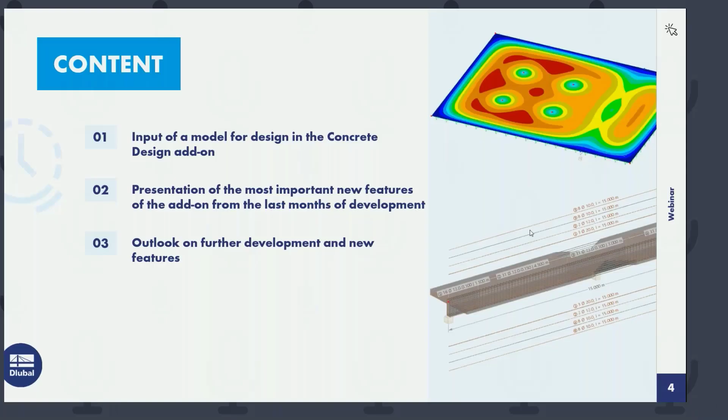Okay, thanks Andreas for the introduction. I will start with a short overview about the content of today's presentation. So, as I already mentioned, I will show you today new features in our concrete design add-on. Therefore, I will create a small structure in RFEM 6. And during the modeling process, I will tell you all the new features which we have now in our concrete design add-on.

Just a short overview about these new features. Mainly it's the automatic function for surface reinforcement. Then we have also a new function regarding determination of required reinforcement for members, which includes now also the serviceability limit state design. Then I will show you how to design with member representatives. We have also a new multi-edit option in the edit member dialog for members and member sets.

If we have entered a reinforcement and we have a certain reinforcement layout inside our member, then we have a new function for printing graphics of this reinforcement template or proposal into the printout report. I will show this also to you. And I will show you how to activate the design check for this shear joint in the add-on.

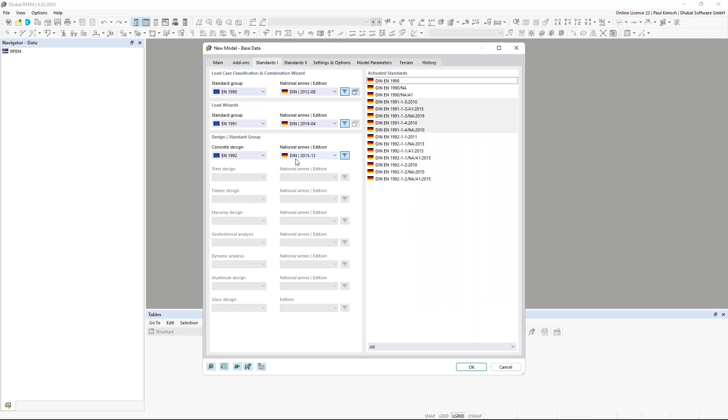That has the benefit that there are some settings stored already in the template, and also add-ons can be activated, or I could predefine here some national annexes and so on. So this is already set in this template, and I would give the name here webinar, and maybe English, so that's the English one. And I start this file here.

As mentioned, due to the fact that I've used these templates, I have here a certain amount of materials, sections, thicknesses, and so on. I will use them today for this presentation.

So at first, I'm switching here to these guide objects, and there I will create a new line grid.

I will use and show you today also the labels and dimensions. Switching here, I enter the dimensions in X direction: 5 meters and 4 spans. So it looks like this. In Y direction, the first span is 5 meters, then 2.5 meters with 2 spans, and the last one is again 5 meters. So this is my line grid, which I would like to use today.

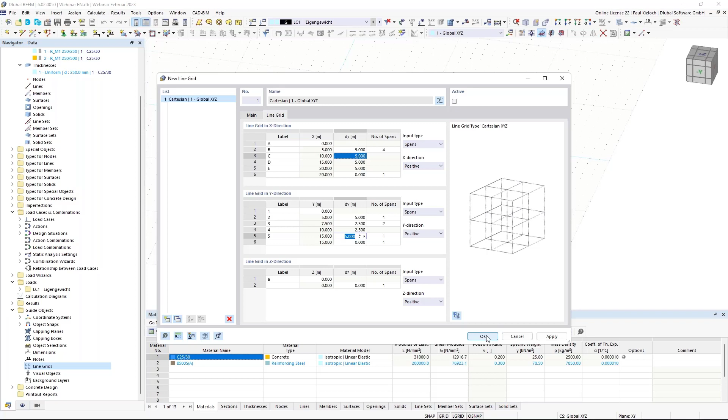It looks like this. On this line grid, I will create my slab, beams, columns and so on. I can switch off the grid in the background, so it's a little cleaner if you just see the line grids.

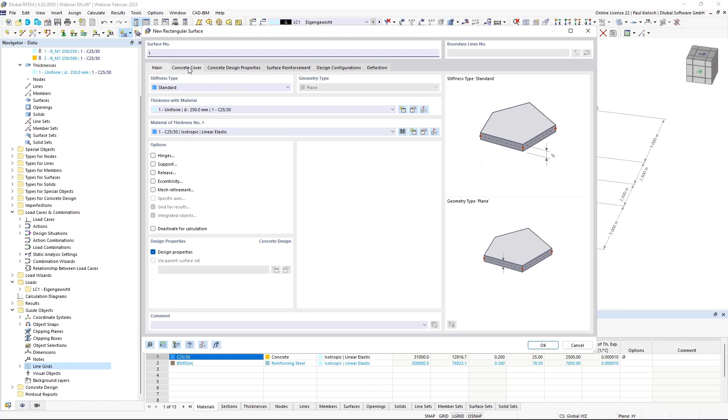The first topic is entering a surface for design. I'm creating here a concrete surface with a thickness of 250 millimeters and this concrete. Before entering this surface, I can directly set the design properties for this slab. The concrete cover and concrete durability class, I leave as default here in this example, XC1.

The reinforcement direction is also default. I will consider and assign a basic reinforcement for the whole slab with a diameter of 10 millimeters and a spacing of 15 centimeters in both directions.

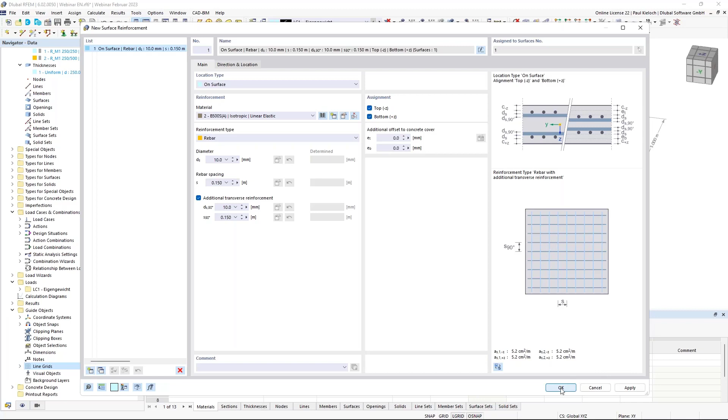You see here already some changes in this dialog, and I will come back to these changes and modifications of this dialog in this latest version of RFEM 6 later, after the first calculation. I can confirm this. The design configurations I leave by default for this first attempt, and I will also come back later to these design configurations.

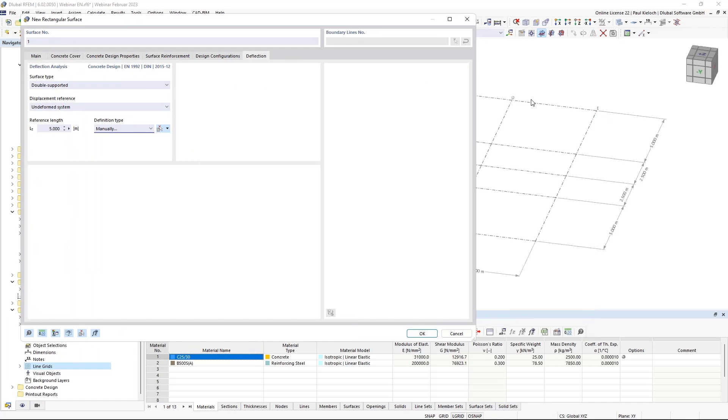The last thing I'm changing here is the reference length for the deflection analysis. I switch this to manual, and the reference length is now set to 5 meters, since I have 5 meters in X and Y direction. Confirm with OK, and then I create my slab.

By default, you see here the rendering of the assigned reinforcement mesh. What's new now in RFEM in the latest version is the description of the assigned reinforcement. We changed it a little bit. In previous versions, there was a small arrow downwards or upwards — downwards meant reinforcement on the bottom side, upwards meant reinforcement on the top side of the slab.

That was changed a little bit, and now it's just a small line next to the text, on the downside or the upper side. So it's a small change. What I would like to change is the number of decimal places for this example. Now I'm switching off this reinforcement just to have a cleaner look on the structure.

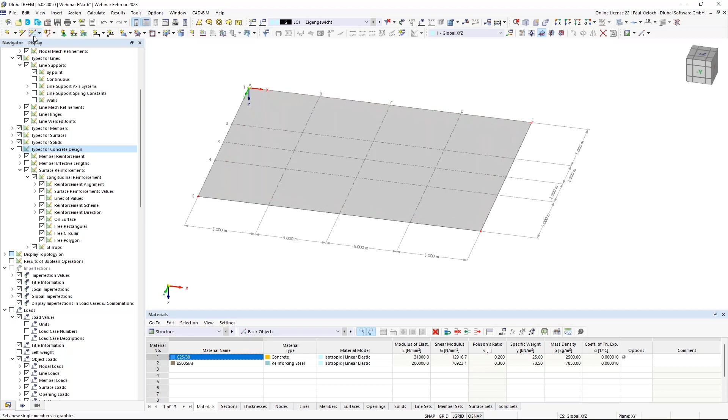The next topic is that I would like to enter a beam, or a rib member, in this axis D. I create a new member, switch the type to rib, and assign this eccentric cross-section on the positive Z side of the surface — that's the default setting. The used section should be this 250 by 500 millimeter section. I can confirm that's okay.

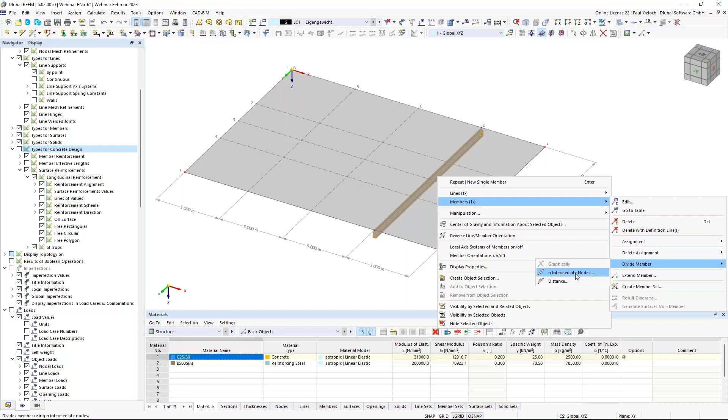Then I will assign this rib here in this axis. Here in axis 3, in the middle of the beam, I would like to support this beam with a column, so I'm dividing this member by one intermediate node. But what's new in RFEM 6 is that we can use this node type 'on member', which has the benefit that our member is not divided into two parts, making it easier for the definition of reinforcement and so on. So I will create a new node with the type 'on member' without dividing the member.

You see here in the middle of the beam a blue, light blue node, and that's the new type for dividing members.

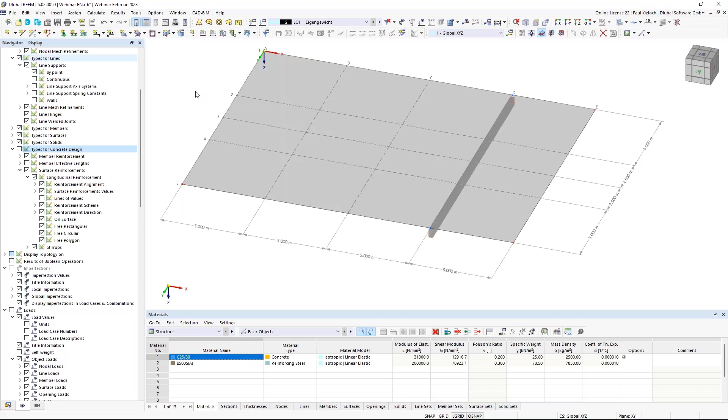The next step I would like to do is entering nodes here for the column heads, so they are located in these points.

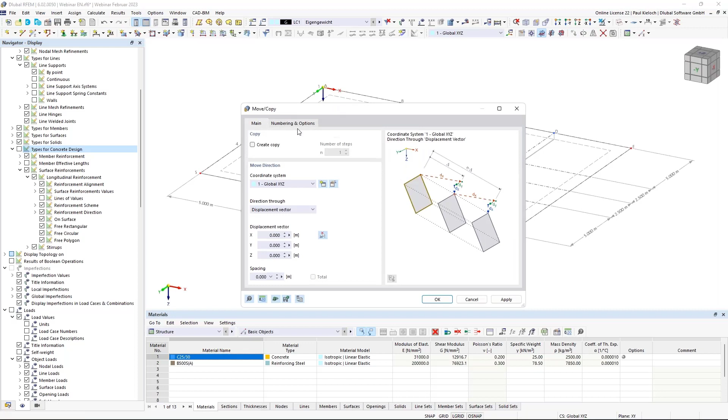Okay, now I'm switching to the wireframe display mode, and I can select these 5 nodes here, then copy them 3 meters in the Z direction, linking these steps to automatically enter a new member. Therefore, I will create a template.

The columns should be hinged at the top and bottom end, so I'm switching the member type to truss. The section is pre-selected in this case, and I would like to use it, with 250 by 250 millimeters.

And I can now go through all the settings and design properties here, entering, for example, the buckling lengths for the stability analysis. In my example, it's a braced system, and I would like to use effective length factors of 1 in both directions.

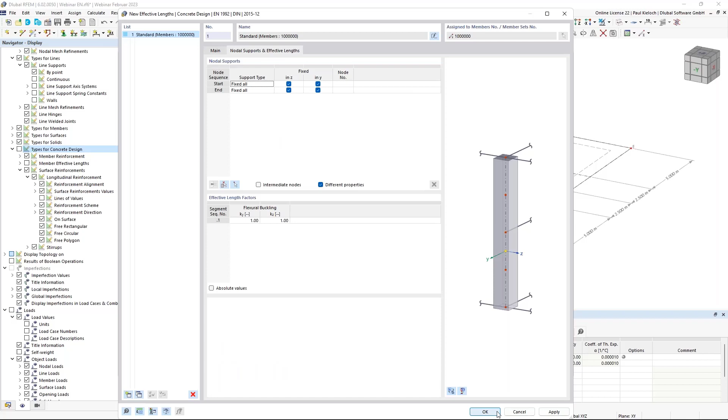Next step would be the concrete covering. I leave it here in this example like it is. Regarding the shear force, I would like to use shear links with a thickness or diameter of 10 millimeters and a spacing of 15 centimeters. And the longitudinal reinforcement should be uniform surrounding, 4 rebars with a diameter of 14 millimeters.

Design configuration and design supports are not required to change here in this case, so I can confirm this. Then I'm using the template to create my columns, and they would look like this.

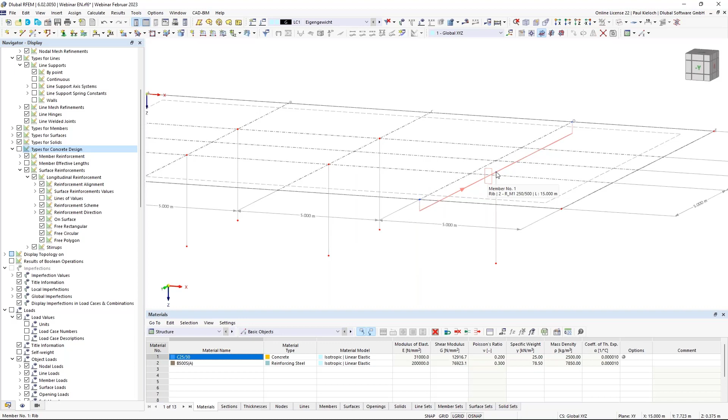I have to take care because this node is here in the center of this eccentric beam, so the nodes at the bottom end are not in the same height. I will just do a double click on this node and switch it to 3 meters, and then we have the same level here.

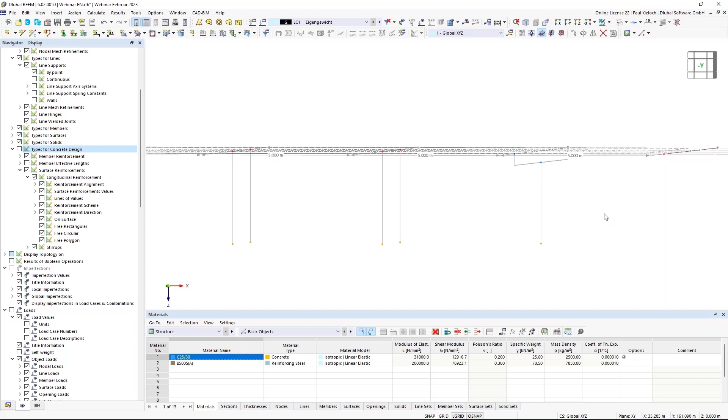Okay, then I can create the supports for these columns due to the fact that I have hinged member ends by this member type. I can create a new nodal support, and this is fixed or rigid in all directions. That would look like this in this example.

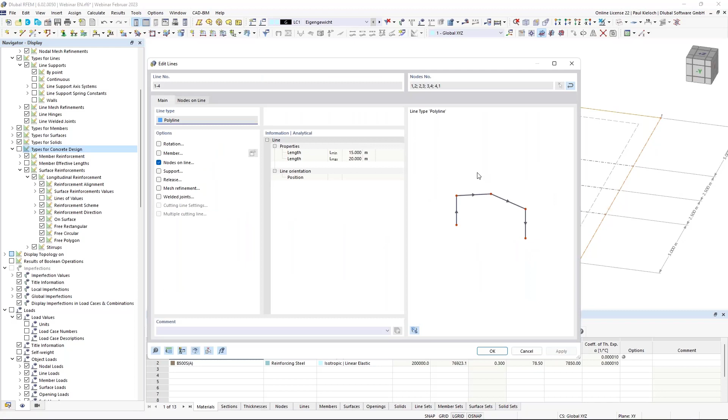Okay, then the next topic would be entering the support at the edge of the slab. So there I would like to consider walls. Therefore we have an option in RFEM 6, so I can select all the lines at the edge of the slab, opening them with a double click, and I will assign there a support, creating a new one for them, and this one will be changed to local.

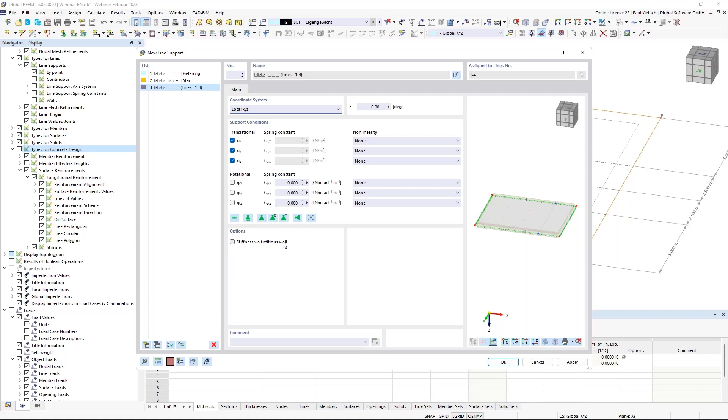As soon as I switch this to local, I'm getting here a new option, stiffness via a fictitious wall, and the wall thickness should be 25 centimeters and a height of 3 meters. It is hinged at the wall head and base, so that's okay for me. I can confirm this, and then I have also the lines on the edge of the slab supported.

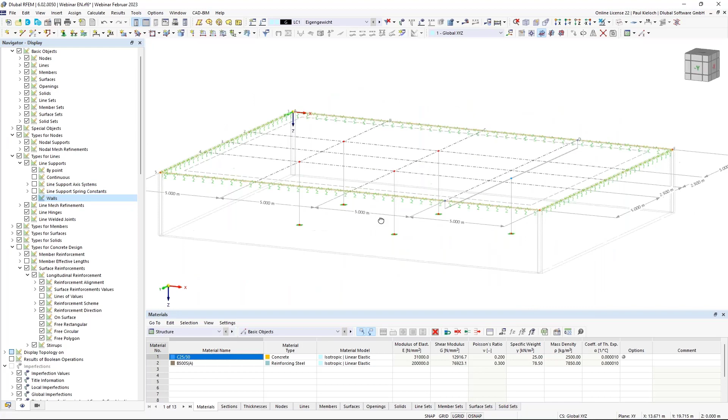If I would like to check this graphically in my system, then I can switch to the view or display navigator. There, under the line supports, I have the option to activate the walls, and then I would see the system also with these fictive walls here. Okay, that is basically my system now.

What I have not defined yet is the settings regarding the RIB. Therefore I'm opening the RIB member once again, and I switch to this tab with the RIB. In this table, you can basically assign the segment length for the determination of the effective width for the ribs. I will not go too much into detail for this part, as we have shown this in our first webinar regarding concrete design in November 2021, and it's also part of the Eurocode 2 training where we get more into detail regarding this table.

I will just enter the values here to have a realistic effective width for this example. I'm using this approach according to Eurocode 2, so I'm setting the segments here, user defined, and it's the same on the other side. Basically I have to do this because I'm using one member which is supported in the middle, and therefore the program needs the reference length.

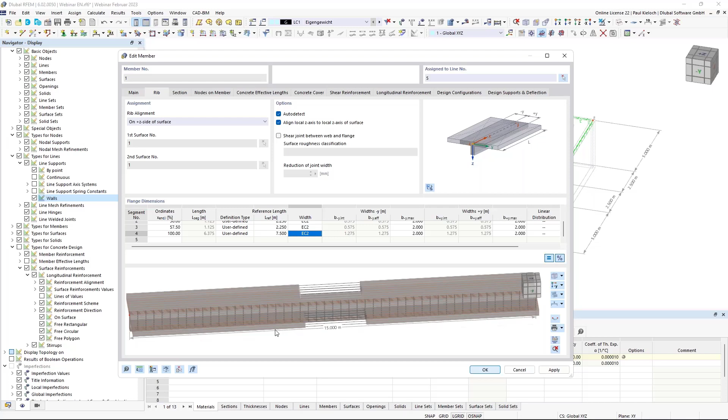So the system would look like this now. I have different effective widths here in the fields, left and right field, and over the column I'm using a smaller width, and the width is determined by the equation according to Eurocode 2. What I can now also assign is a linear distribution over this column, over the support in the middle, so you have the option to assign to end and from start, and then I would get a linear distribution of the effective width. That's what I would like to use today.

And I will stay here in this tab, because here is now already our first new feature. You find in the middle the option to activate the design check for the shear force between web and flange. So if you would like to perform this design check, then you have to activate this option here.

And then you get the settings regarding the roughness of the surface. You can set it here up in this dialog. And there is also a second setting in the configuration. I will show it to you in some minutes.

So next is the section tab. There I do not have to do any changes. This is okay so far. Concrete covering also, so I can directly switch to the shear reinforcement.

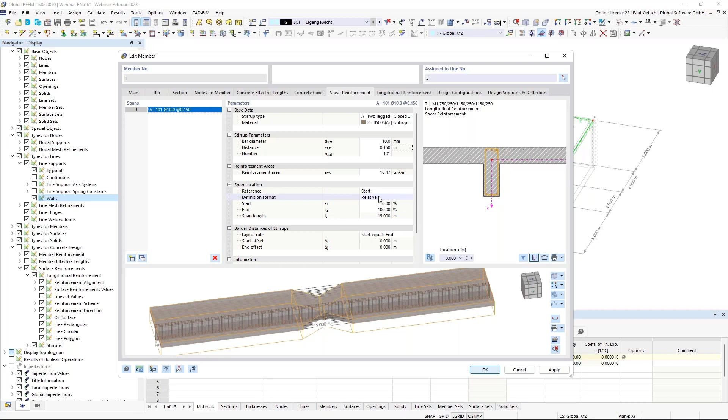So therefore I'm creating new spans. First switch here to absolute for the definition of the span length. Then I just click 2 times on this button. And then I'm getting here this spans. If I zoom in a little bit, then you see that here this middle span is now a little bit displaced and not in the middle of the member.

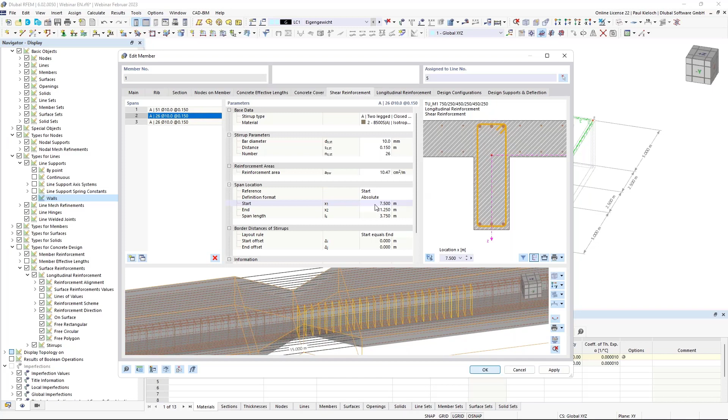And I can change this here to 6 meters. And in the second X location to 9 meters in my example. And then the span is in the middle of the beam. And I can change this to 0.1 meters or 10 centimeter spacing. Okay, that's my shear reinforcement I would like to use today.

And then I'm switching to the longitudinal reinforcement. By default, the reinforcement is using here 3 rebars at the top side and on the bottom side. I will change it to 4 rebars.

And then you find also here the rebars from the surface reinforcement, which is automatically also assigned to the flanges of the rib member. If you do not want to assign these surface reinforcement here, then you can switch it off via this button, but I will leave it on here for this example.

Last thing I would like to add here is additional reinforcement on the sides of the web. So therefore I'm creating a new item. And this one is a uniform surrounding for my example here.

Now, if you have entered the shear reinforcement or the longitudinal reinforcement like this, and you would like to print a graphic of this definition into the printout report, there is also a new feature. You can click on this button here, and then you get a new dialog called reinforcement layout. And in this dialog, we have here a new button, a new function, and there you can print the graphic directly into, for example, a printout report or 3D PDF or a graphic as a file.

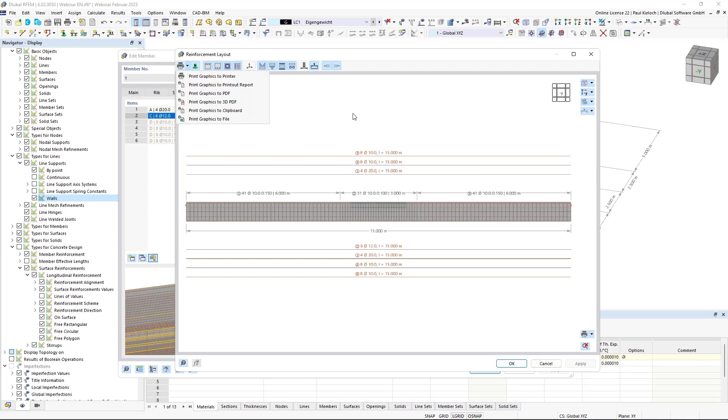So it's not a CAD file, it's a picture file. So you have this option, basically the same like for printing a regular graphic into the printout report. So that's also a new feature in the add-on.

Okay, then I'm switching to the tab with the design configurations. There we have the ultimate configuration and the serviceability configuration. And in both configurations, we have now 2 new features, or in every configuration, we have 1 new feature. If I'm switching to the ultimate configuration,

then you can see here this shear joint, and that is what I have activated before in this tab with the rib. So in general, there is always the shear joint design check activated, and there you find further settings, for example, how the program determines the shear stress in the joint, or you can also activate here design of flange connection on segmented cross section. So if you would like to perform these design checks, then you can check it on here in this ultimate configuration. So just keep in mind, this is always active, but you have also to take care here whether you have activated the shear joint in the individual members.

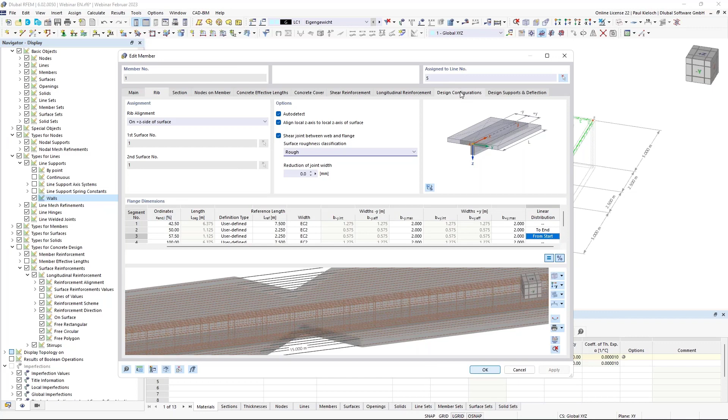The next new feature is inside the serviceability configuration. So inside the serviceability configuration for the members, you find here a new option, determination of longitudinal reinforcement for members.

We have implemented this at the end of last year, and now it's possible, if you check this option on, to consider also the parts from serviceability limit state in the result diagrams for the required reinforcement. So in the older versions of RFEM 6, there was just the ultimate limit state considered in the diagrams for the required reinforcement. And by activating these options, the diagram will also consider the parts from the serviceability limit state.

If you click on this here, then you get a little tooltip. And there you see that currently this option considers the requirement for the minimum longitudinal reinforcement, the design check for the limit diameter, or the maximum spacing. So the direct crack width calculation is currently not implemented. Okay. That's so far regarding the new features in the configurations.

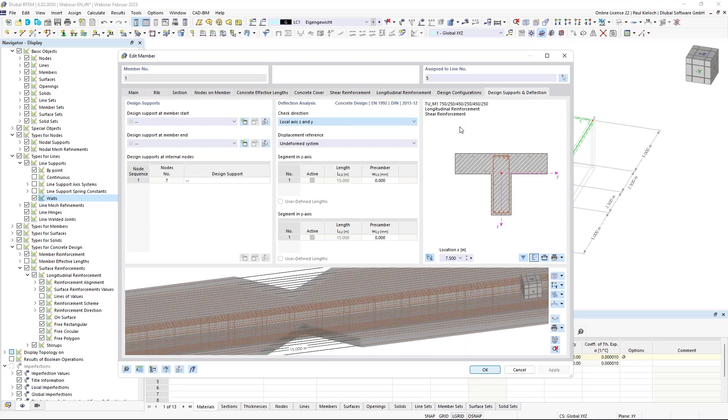One last topic I have to enter here is the design supports. In concrete design, we are checking the deflection in Z direction. So I'm switching over to the local Z axis. And if I zoom out a little bit, then you see that the member length is 15 meters. So this dialog basically does not know that we have a column in the middle of the member. So the reference length would be by default the total member length, and for the deflection analysis that would not be okay in this case. So I have to enter design supports to consider this correctly.

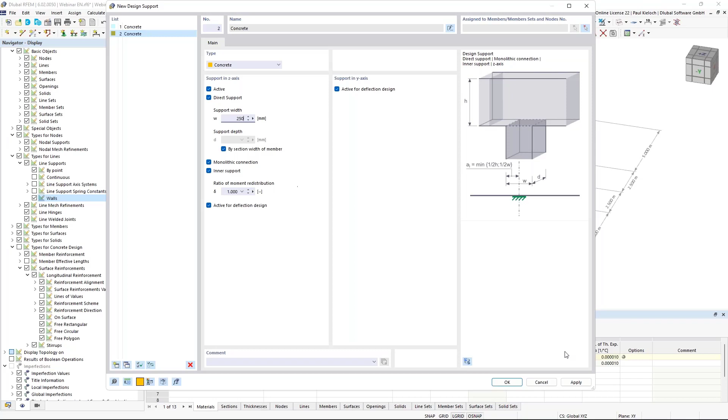I'm creating a new one, monolithical, with a width of 250 millimeters in my example. That will be assigned at the start and the end of the beam. And then we have also one here in the middle. That is an inner support, also 250. And as soon as I have assigned these design supports to this internal node, then you see that we have two spans, each with 7.5 meters. Okay.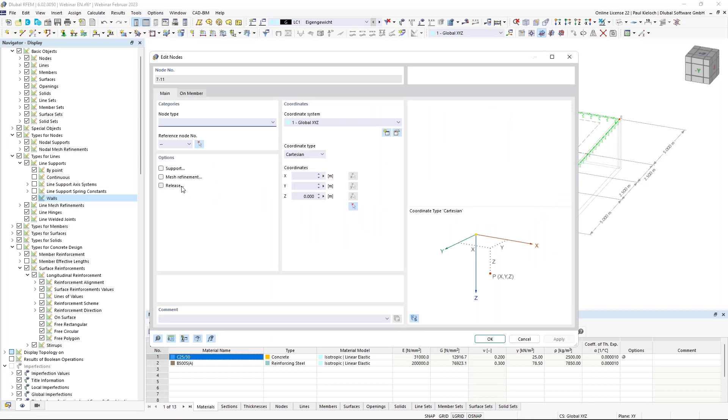We have defined our reinforcement for the member. And the next topic I would like to enter here with the structure is an FE mesh refinement. I would like to assign the FE mesh refinement on these nodes. So I'm selecting them, double click FE mesh refinement, and I create a new one that should be rectangle in my case, and I'm using an inner length of 7.5 centimeters.

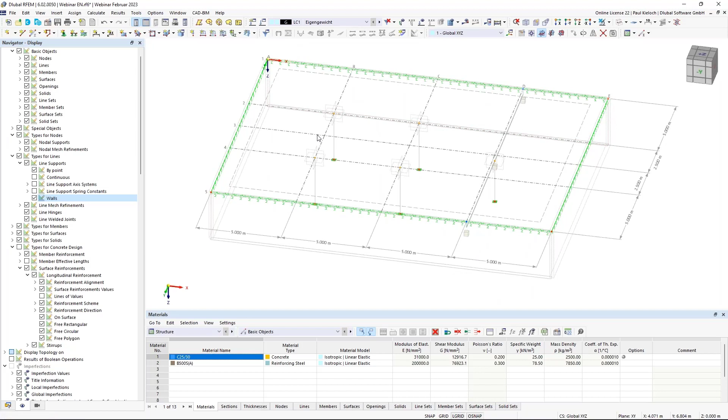Okay, so it looks like this, and now, if I have assigned a mesh refinement, I can also use in this situation a surface result adjustment to use average values of the surface internal forces. Therefore, I'm going to the special objects, and there you find the surface result adjustments. So I create a new one for surface 1. I will use dimensions in A and B direction with 0.75 meters, both directions.

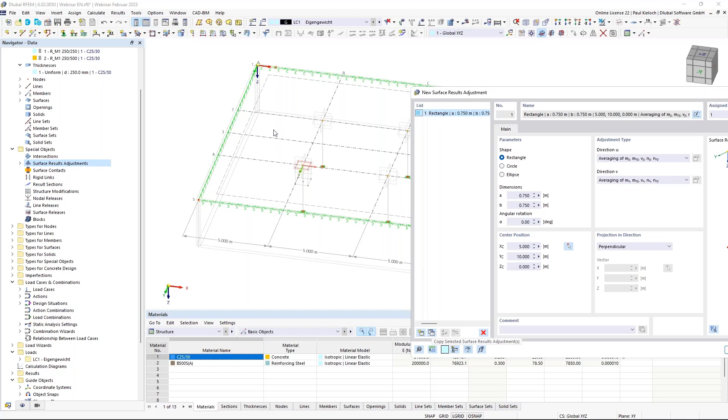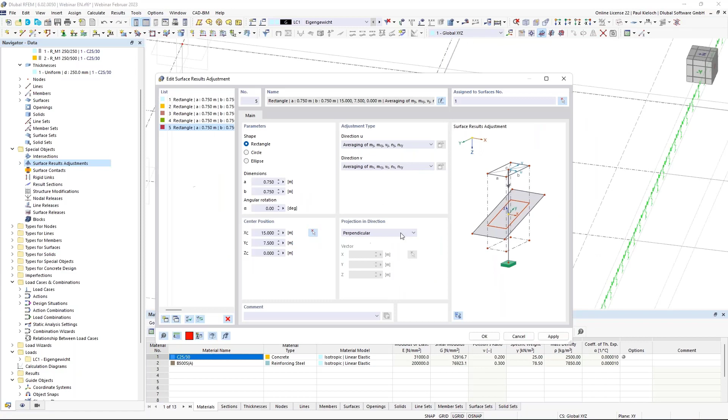And with this button, I can set the first location. And then if I click on apply, I can show you where this is located now. I'm using this button for copying this assigned surface result adjustment. And then it's pretty easy to create them, just clicking on copy and switching the location. It goes like this. Here. Okay. And if I click on apply, then you see them here in my file. Okay.

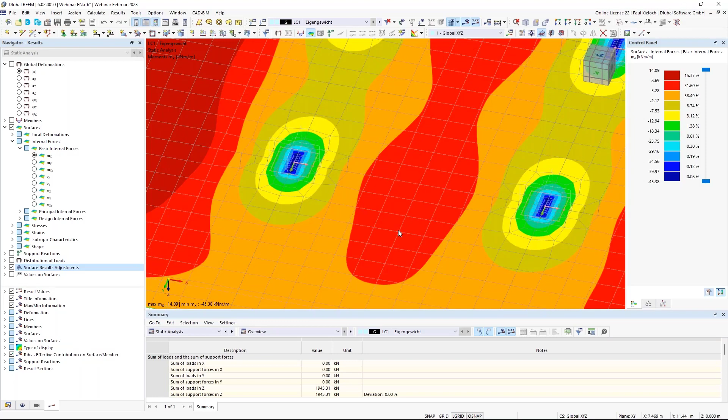The next step would be to enter the loading. Before I'm doing this, I just want to check whether my structure is correctly entered, whether there are maybe some problems regarding the mesh and so on. Therefore, I will just calculate the first load case. And yeah, that looks okay. Everything seems to be connected properly. And now I can show you also, if I switch to the internal forces of the surfaces, how the surface result adjustments are working. Yeah, so everything seems to work.

And now I can switch off the results and the FE mesh, and I can switch off the surface result adjustments, the result objects. And I'm also switching off, for nodes, the nodal mesh refinements, and then I have a cleaner look on the file. Okay.

Now I can start with entering the load. At first, I need some new load cases for this situation. So my first load case will be the load case for the self-weight. I will call it just DL for dead load. And then I will create a new one, live load 1. And I'm using this category. And I'm copying this. And then this one is live load 2. This one is live load 3. And this one is 4. Okay. Apply.

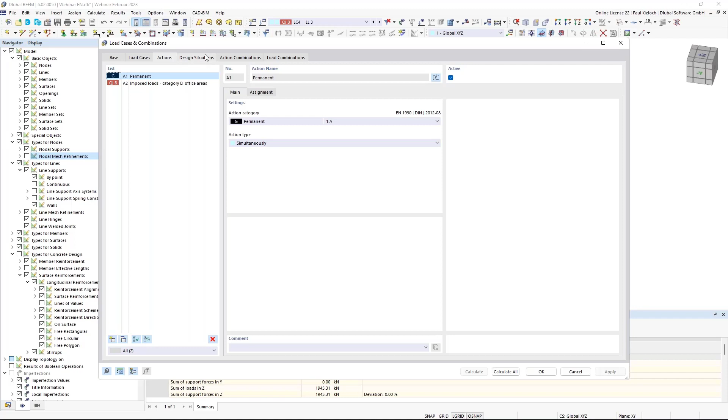The actions are okay in this example. I'm switching to the design situations. The design situation serviceability limit state frequent is not required here in my example, so I can delete this one, and I will do the design checks just with the characteristic and the quasi-permanent design situations.

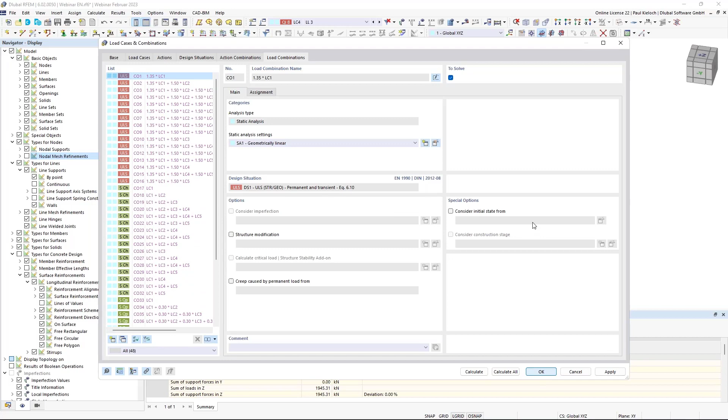One change is that I will create load combinations according to first order analysis. So I'm switching that here and switching to the action combinations. And then if I click on this tab, I will get the load combinations, and they are all according to first order analysis. Okay, those are my load combinations for this example. And now I can start filling these load cases with loads.

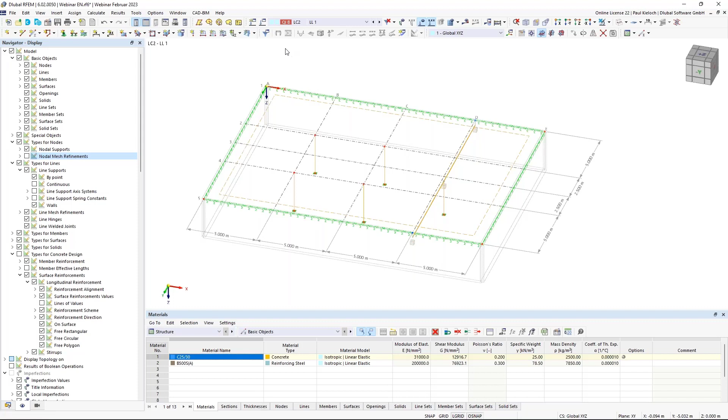So the first load case, dead load, will have 1.5 kilonewton per square meter on surface number 1, and it looks like this. Here in the second load case, it's now a little bit more problematic. For the live load, I would like to use a loading pattern according to this grid, to these fields here. Currently, we do not have a load wizard for this, so I will create the loading pattern by using surface loads, rectangular loads, and polygon loads for this situation here.

So I'm in my load case 2, and I will create a rectangular load on surface number 1. The load value here in my example is 3.8 kilonewton per square meter, and the location here is from that point to that point. And I can click on apply next, and then I see here the load in this field. And now I'm just entering the surface and switching the location once again. Looks like this. Apply next. 1 and here on this point.

Okay, so in this situation here and in this situation, it's a little bit more complicated. So I cannot use the rectangle one. I will use the polygon load here. It's also assigned to surface number 1. And then from this point to that one, and that one, confirm, okay. The load value is also 3.8. Okay, and then I need this function once again. And now from here to these nodes. Okay. And it looks like this.

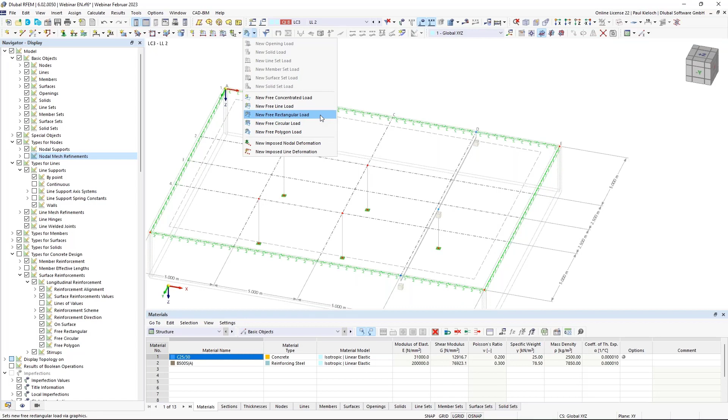So now I switch to the next load case. And I'm starting once again with the rectangle. 3.8. Here. Apply next. Here. Apply next. Here and OK. And then I'm switching to this polygon load here, from that point to that and that point. Okay. 3.8. Okay.

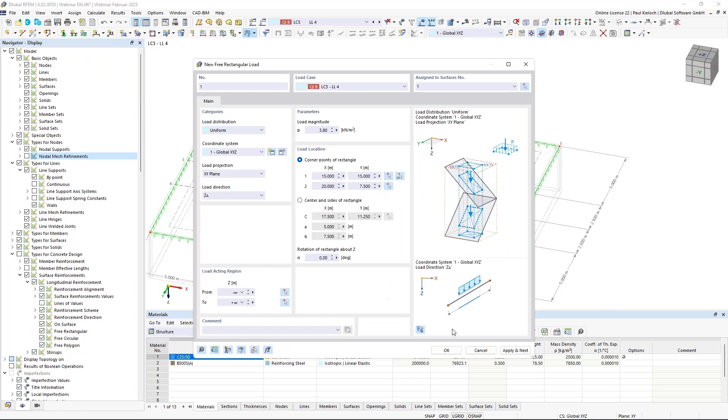For the live load 3, I'm using the rectangle again. Surface number 1, 3.8 kilonewton per square meter. And it's from here to here. And then I can click also here, apply next. And then I can switch here the load case in this dialog, assign it to surface number 1 again, and switch the nodes. And then it would look like this.

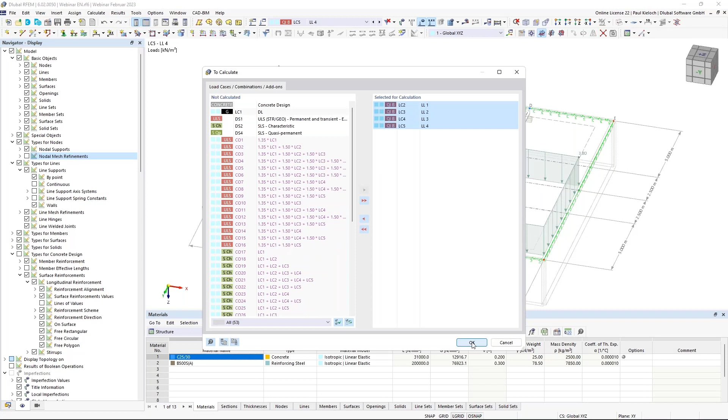If I'm entering these loads like this, then I'm always starting a short calculation. I'm going to calculate. I'm just selecting the load cases where I have assigned the loads. Start the calculation. And now what I'm always doing here is switching on the load distribution here in RFEM. I'm switching off the load itself, but just the 2D elements. So now I can switch to all load cases and check whether the loads were applied correctly. So I have here my 3.8 kilonewton per square meter, so I can directly control the loading pattern here. Okay, that looks okay so far.

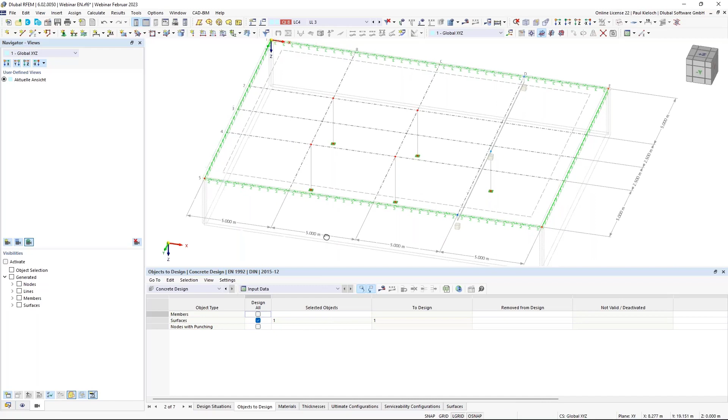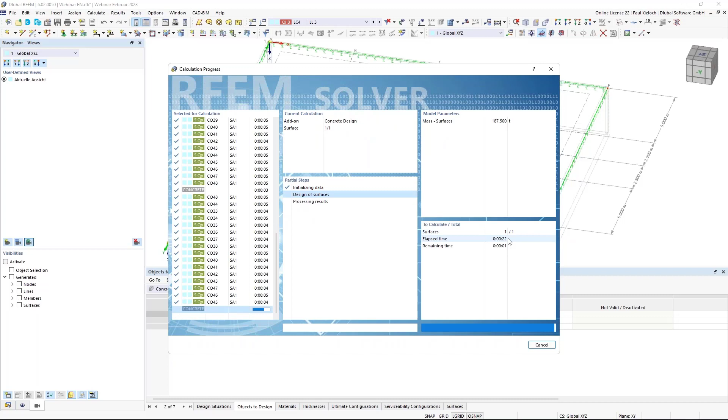So we have entered our combinations and also our loading. And now I can basically start with the first calculation in the concrete design add-on. Therefore, I'm switching here in the table to the add-on concrete design, and by default all objects are activated here, but I will do the first attempt just for surface number 1. And then I'm starting the calculation. It takes a moment, and then the program will show us the design checks for surface number 1, and we can check the design ratios at first for the ultimate limit state. And then we can check where we have to enter additional reinforcement.

Okay, so basically if you do surface design, this dialog will in most cases look like this or similar. So you have several points where it's not designable, or you have not designable nodes. Therefore, I would switch over here to these design checks on surfaces. And in my case, I would like to check it, for example, for the top side in direction 1.

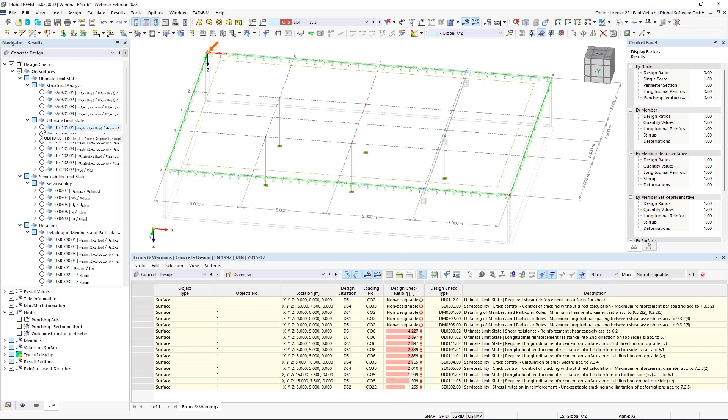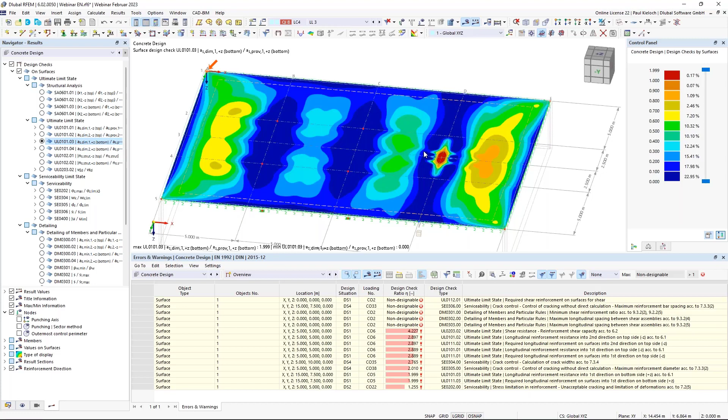And then it looks like this, that especially over the columns, I have elements where my design checks are not fulfilled. So here you see it, it's a range from 1 to almost 3 times not fulfilled design checks. That's the same also in the other direction. And on the bottom side, it looks a little bit better, but yeah, there's also a small problem here in this area. So if I have this result diagram in this way, then I can also switch to the reinforcement.

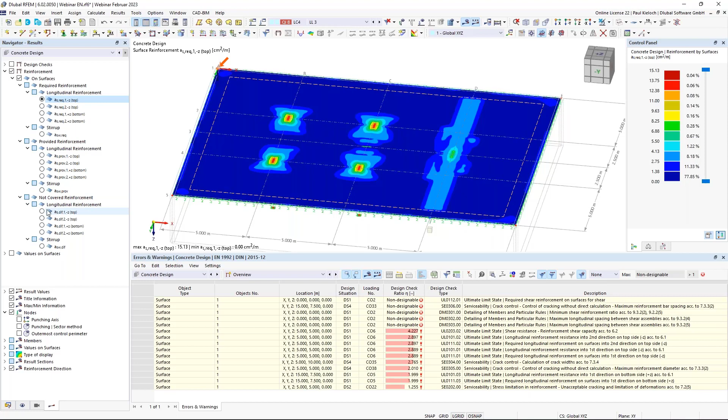So on the reinforcement, I can switch on the required longitudinal reinforcement on the top side. And then I see these values here. And one more informative graphic would maybe be switching over to not covered reinforcement. So we have assigned here a basic reinforcement of 5.24 square centimeters per meter, and now it would be interesting where I have to assign additional reinforcement, and therefore I'm switching over to this not covered reinforcement.

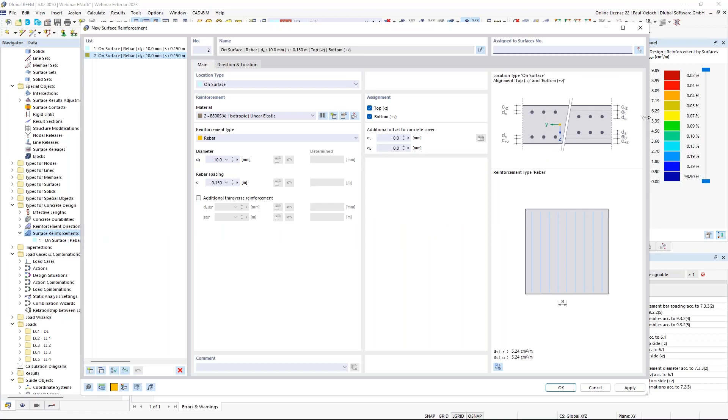And that is, like I said before, basically over the columns, and here in the middle of the slab there's also one area where I would need additional reinforcement. Now if I'm entering additional reinforcements, there we have a new feature, and therefore I'm switching here in the data navigator to the types for concrete design, surface reinforcement, and I create a new surface reinforcement. This new surface reinforcement will be also assigned to surface number 1, but now not on the total surface, but it will be changed here in my case to a free rectangular location type.

The first additional reinforcement, I will assign just on the top side, and I will enter here an additional offset of 20 millimeters. And I will use this additional reinforcement in both directions. And the location will be here, for example, on this point. And the dimensions are 2 by 2 meters. And just clicking here on apply. No, not yet. So, we'll enter it once again. Millimeters, okay. On this point, and 2 by 2 meters, okay.

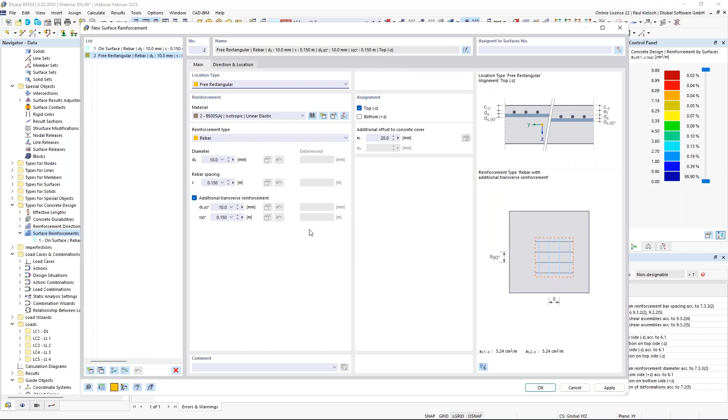So as I said before, there is now a new option here regarding determined and buttons to overtake a determined value. And these buttons are required for a new function in RFEM 6. And you can find this new function if you click here on this button. Once in the diameter, it's called auto, and also in the spacing. So what you can do here now is you can assign an additional reinforcement, which is covering automatically the not covered reinforcement from the first calculation.

So in my case, I'm needing here an additional reinforcement of around about 10 square centimeters per meter. And I can say that I would like to use rebars in both directions with 12 millimeters. And the spacing between the rebars should be determined automatically. So if I'm selecting auto, then the program shows me these additional parameters, and there's the minimum spacing and the maximum spacing defined here. So I will use 10 centimeters as minimum and 30 as maximum, and confirming this with OK. It's the same in this other direction. OK, I click on apply.

So the next is that I'm copying this one here. Copy, and I just change the location. So that is basically the same like I have done it before with the surface results adjustments. This one, and OK. And the last one will be here. Okay, and the last one is just in direction 1. I will use 10 millimeters here, but this time on the top and bottom side, this way. Also auto, OK. I can click on OK. And it looks like this.

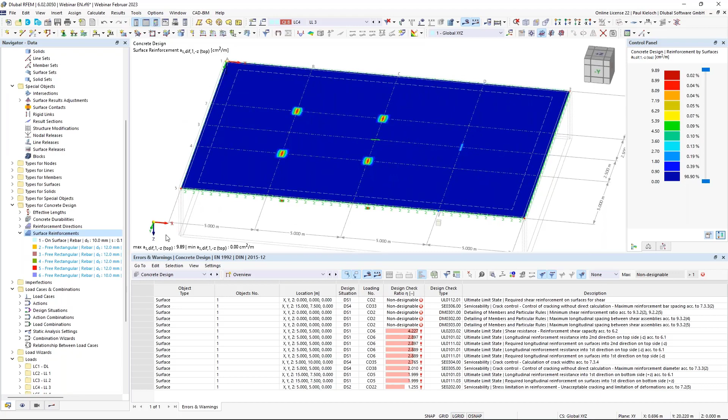So now I just go to Concrete Design. Okay, so results, just delete the results here. And now, due to the definition of this additional reinforcement here, I've just forgotten to assign this to surface number 1. That was the problem. Okay, now it's assigned.

And if I switch the display setting on, then you see here on these slabs this additional reinforcement. It looks like this. And due to the fact that we now in this state do not know which value is assigned, we have just the info that it's auto reinforcement. So with these settings, I can start the calculation once again.

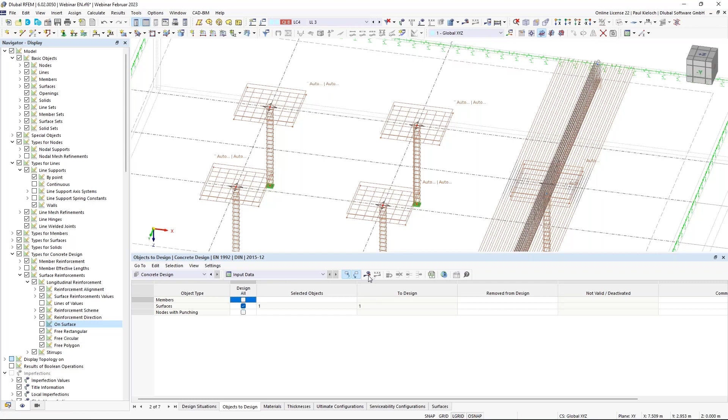And now the program will cover all the not covered reinforcement automatically, and the result will be that I'm getting an info about the spacing I have to use if I assign, for example, a diameter of 12 millimeter or 10 millimeter and so on. Maybe one point which I have not mentioned yet is that you cannot assign the auto function in diameter and spacing at the same time, so that is not possible. You have to use either the automatic function for the diameter or the spacing.

And now you see here the info with the required or assigned additional reinforcement, so the value in square centimeters per meter. And if you would like to see the spacing, then you have one option. You can go to the reinforcement on surfaces and to the tab here in the table surface reinforcement. And if you click on one item, then this line or this item here also in the table will be highlighted.

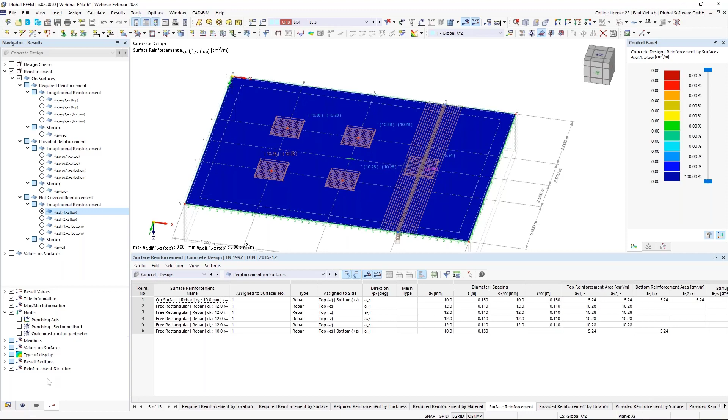And in this case, I see that I have to assign at least additional reinforcement of 12 millimeter and a spacing of 11. So maybe you think that spacing of 11 centimeters is not so practical, so you can also use other values. So if I'm opening the dialog for edit reinforcement once again, you have now two options basically. One would be that before you start the auto process, you can switch the increment in this additional parameter settings so that you, for example, use just 5 centimeters. That would be an option.

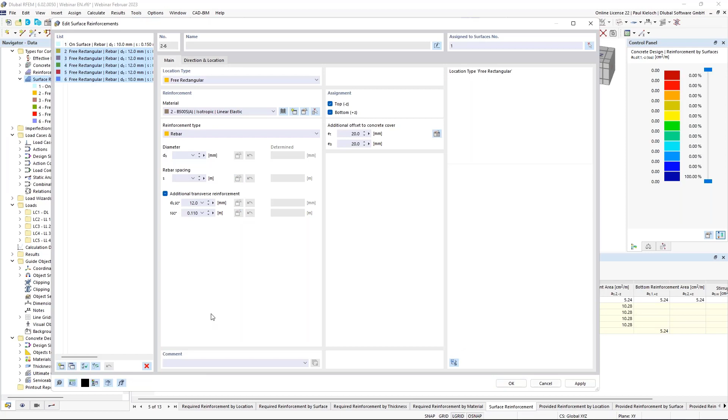But you can also use now this determined value here and overtake this in this cell, and then you can edit it. So I could overtake this value and modify it, for example, to 10 centimeters. That's one option using this button here. It's also possible to select all items here which have this auto setting. And then you can use the same button here at the bottom end, and then the program uses the automatically determined values here. Okay.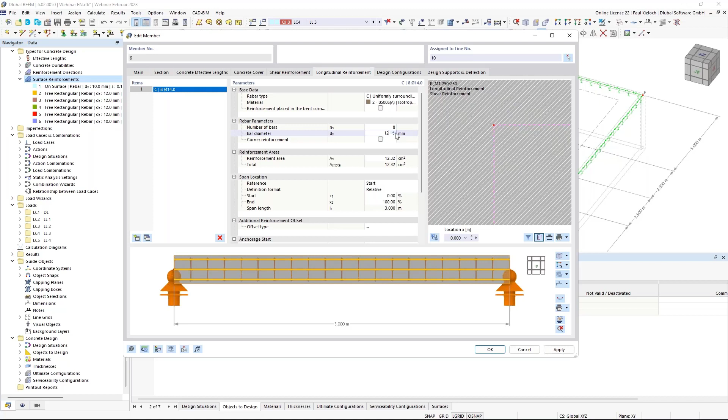I can assign this one, and I will delete the values just for concrete design. And before I'm starting the next calculation process, I will continue with the columns. With the columns, I will show you two new features. One would be regarding the multi-edit. So in case you have a member with a different type of reinforcement layout. Let's say, for example, in this member, I would assign 8 rebars with a diameter of 12 millimeter. It would look like this. So here we have our 4 rebars with 14, and here 8 with 12 millimeters.

In the previous versions, we had the limitation that if you had different reinforcement proposals, then it was not possible to do changes in the shear reinforcement and longitudinal reinforcement. And this little downside is also solved now, because now it's also possible to show members with different settings. So you see, for example, that we have here the same rebar type, but here we have a different number of bars, so from 4 to 8, and also different spacing.

And here in this dialog, there is basically a certain member of the selection displayed. So if you would like to see another member, then you can switch here with this option between the members, and then you would see the rendering for the selected member. What I can now do with this new function is that I can put several different members into one selection and change the reinforcement for all these members in one step.

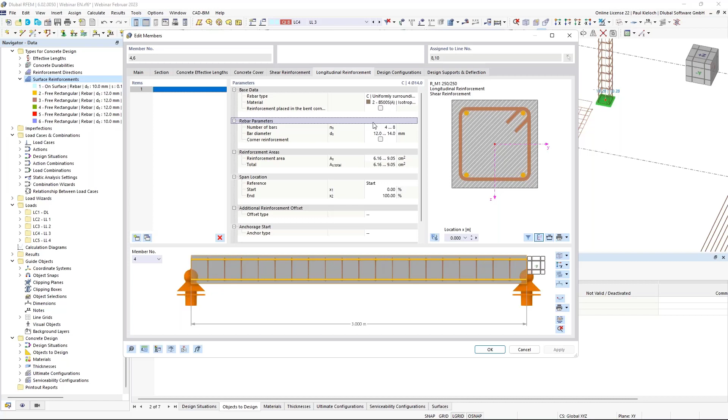So I would set it back to 4 rebars with 14 millimeters, and then it's the same for both, and I will also get the name or the description of the item back, because the amount of rebars and the diameter is clear. Okay. That's basically regarding the multi-edit. So you have this multi-edit for the shear reinforcement and also for the longitudinal reinforcement. In my case, it's also the same length, but it's also possible to use this multi-edit if the lengths of the members differ.

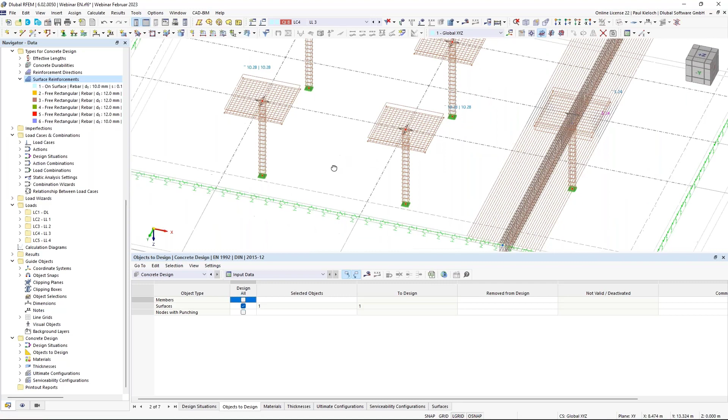So the next feature I would like to show you is using member representatives for the design in the concrete design add-on. Therefore, I will create types of columns. So let's say you have a lot of columns in your structure and you would do the calculation with different types. Then you can, not create, but enter here a comment. Let's say in my case, column type 1, this one. And the other 4, I would add a comment and say type 2, for example.

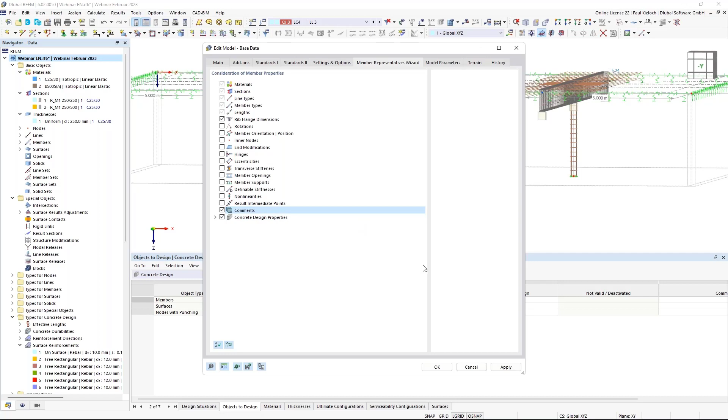So the next step would be to activate the member representatives in the base data dialog here. And if you switch or activate this member representative wizard, then you have the option to also consider these comments. So I'm activating these comments here. And then if I click on OK, I'm getting these member representatives. So we have one member representative with the blue bubbles here, and one with this green one.

And I can maybe do a double click on it, and I could directly switch the name here to type 1 column, apply, and this one maybe to type 2. It's not required to change it, but it maybe helps you afterwards in the documentation, because you can also create printout reports and tables including the name, and then it's maybe easier to document the results for the individual column types.

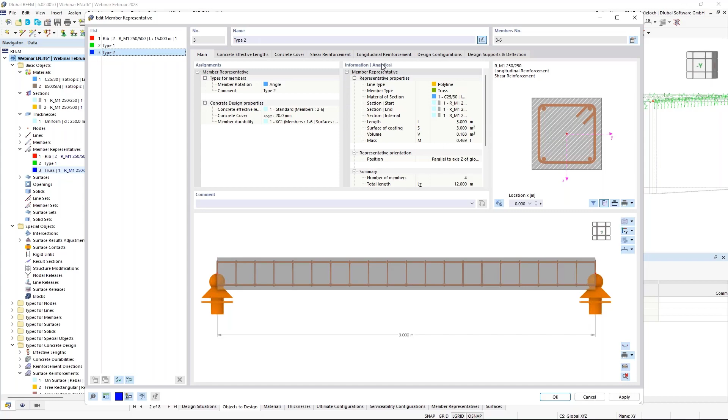Okay, so what you now see is also that if you are working with these member representatives, you can now also assign shear reinforcement, longitudinal reinforcement, and in general set all the design properties by using the member representatives. Okay, I'm confirming this with OK. And now you see in the table with the input data these member representatives. In my example, I would like to do the design just for the type 2 and type 1 column.

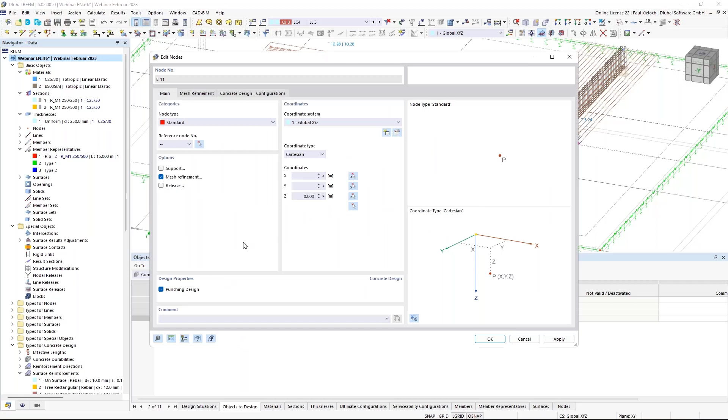I will do the design for the member here. This one, OK. And then I will activate all my punching points here in the table, but I have to activate them also here in the structure. So this one, and this one. It's for nodes, and I will activate the punching design check. And in the configuration for punching, I'm switching on the option that I would like to use the provided longitudinal reinforcement.

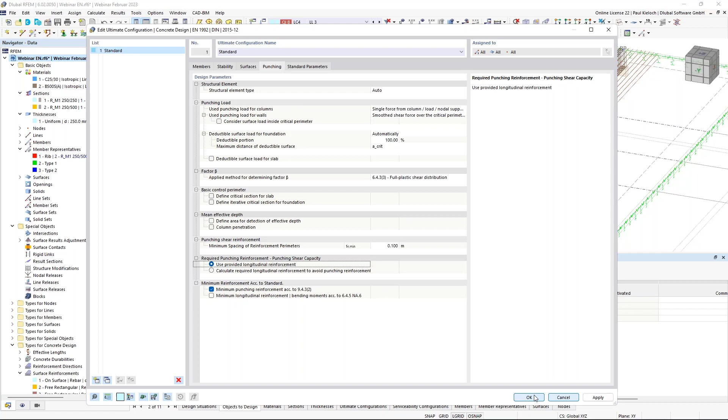So as I said before, I have used this auto function to create this additional reinforcement, and I will now also use this provided additional longitudinal reinforcement for the determination of the punching shear capacity. Okay. That's basically all. I can now just save this file, and then we can start the calculation for the whole structure, but I will just switch off the types for concrete design, and then I'm starting the calculation process. And in the meantime, I'm switching over to the presentation.

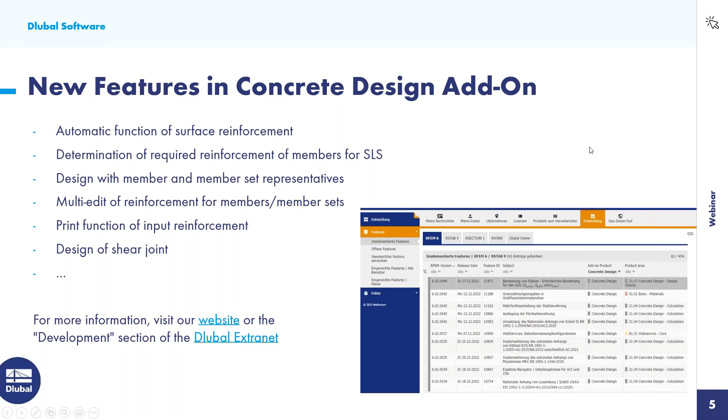So while the program is calculating, I will just give you a brief overview of the upcoming new features in our add-on for concrete design in RFEM 6. It's a random list, so it does not mean that the first mentioned feature will be released first. So the same determination of required reinforcement I have shown you for the members, with the option in the SLS configuration, we are also developing for the surfaces. Then nonlinear calculation is also in development for ultimate limit state and serviceability limit state for slabs and members or beams.

Then one upcoming feature is also the merge of the shear and punching shear design checks and reinforcement into one graphic. Then, of course, fire resistance design checks, and seismic design of concrete components according to Eurocode 8. Then we are developing an interface between RSECTION and RFEM 6, to have the option to reinforce general massive cross-sections in RSECTION, not just in terms of longitudinal reinforcement, but also stirrups. So you will be able in future to create free-form stirrups in RSECTION, then import this cross-section to RFEM 6 and do the design check there.

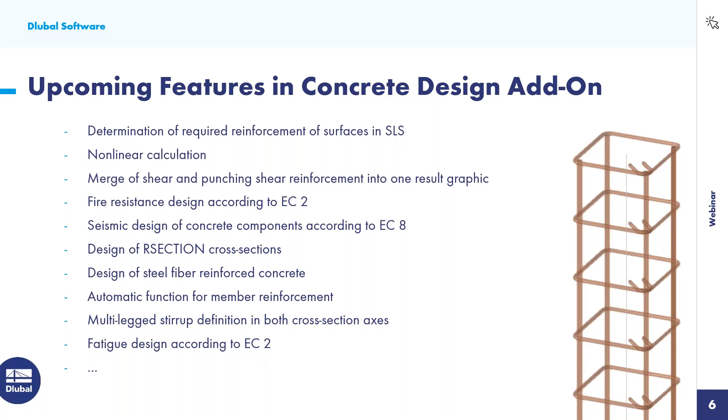One open topic is also design of steel fiber reinforced concrete. Then the same automatic function we have now seen for the surfaces, we are developing for the members. And in context of the Eurocode 8 design checks, we will also have multi-legged stirrups, not just in Z direction but also in Y direction, so in both cross-section axes, and fatigue design according to Eurocode 2 is also in development. Like I said before, it's just a random list, so this feature list is not in context to any release dates.

I will switch back over to RFEM now, and we can just do a quick overview of the results, because there we also have some new features. Just one for the members. So I have done the design on the member here.

Just for this rib, I've used one member here, this rib member. If I switch over here and show you the design check for shear force, since some version we've extended the amount of intermediate results, so it's a bit more detailed now than in previous versions. You just click on this small arrow to get more detailed results.

Here you see the results for the new features regarding the shear joint. That's all listed in the design checks for the members.

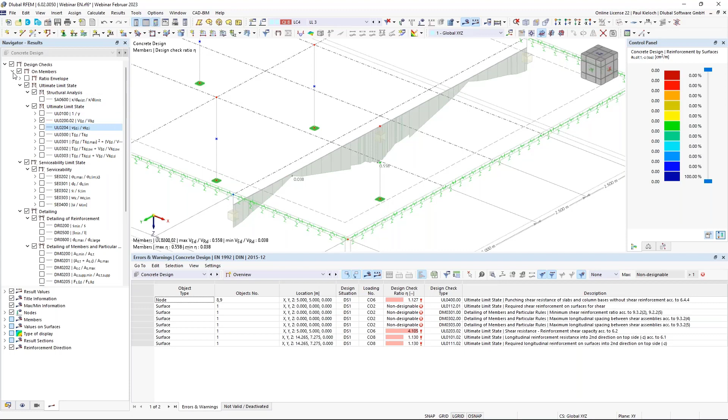If I switch over to the member representatives, that's basically the same, but what I'd like to show you is if you do the design in the add-on with member representatives, you get the same result for the individual member representative. So I have 4 columns here, and the 4 columns have the same results.

If you want the individual results for the individual columns, you can use, as I said before, the representative for input, and you have to design the individual members, not the member representatives.

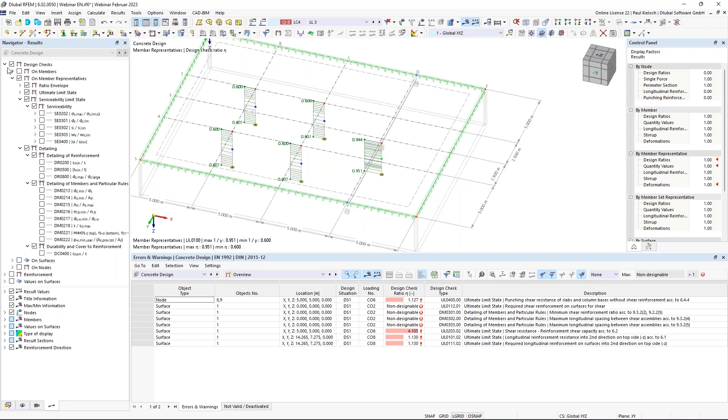Regarding the surfaces, we checked the results before. I'd like to show you one last new feature regarding punching, because in the latest version we've now also implemented this load increasing factor beta, which is now possible to activate here in this detailed result. So under the design checks on nodes, you find this load increasing factor beta.

If I switch over to the reinforcement on nodes, and if you've activated the required punching reinforcement here, you can click on isolines, and by activating values on surfaces, you'll get the individual amount of required punching reinforcement in the individual perimeters.

And now, the last feature I'd like to show you: you have the option in the nodes to also display the outermost control perimeter here. That's also connected to the feature I mentioned before in the presentation, that we plan to combine the results of the design check for shear force in the slab and also punching shear above these columns.